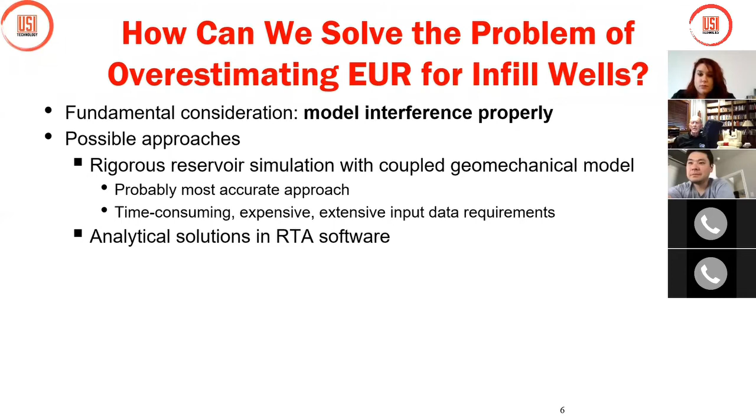Another approach which some people have used is to use analytical solutions that are available in rate transient analysis software. The basic idea here is to history match early data, which is going to be mostly transient data, that is pre-interference, and from those data, maybe get estimates of permeability and fracture properties. And then given that reservoir description, then with the analytical models, put in different well spacing to see when and if we're going to have interference.

The problem here is these analytical models are really simplified. They're basically built on single phase flow models, and that's not real life either.

Probably the approach that most people use most of the time is to base well histories on what they find from empirical decline curve matching and put those together and construct type wells, kind of averaging the empirical decline curves. Problem with that is pretty serious. And this is going to model interference only if that interference was present in the production histories of those wells that were used to construct that type well.

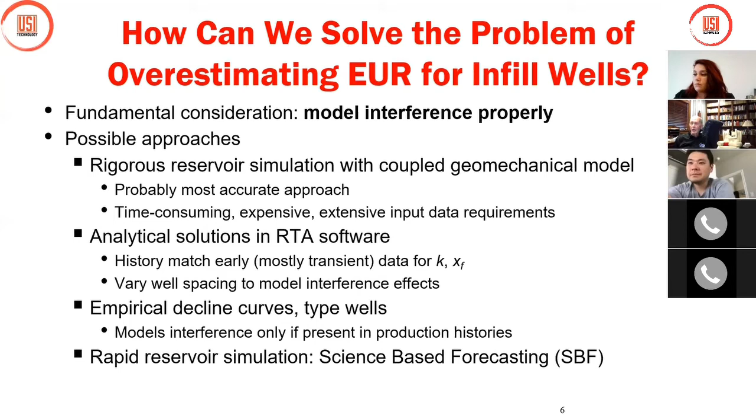So there's a need for something that's simple, rapid, inexpensive, and that can properly take into account interference. And I'm going to suggest to you that that methodology is what we're going to focus on here today, which we call science-based forecasting, or SBF.

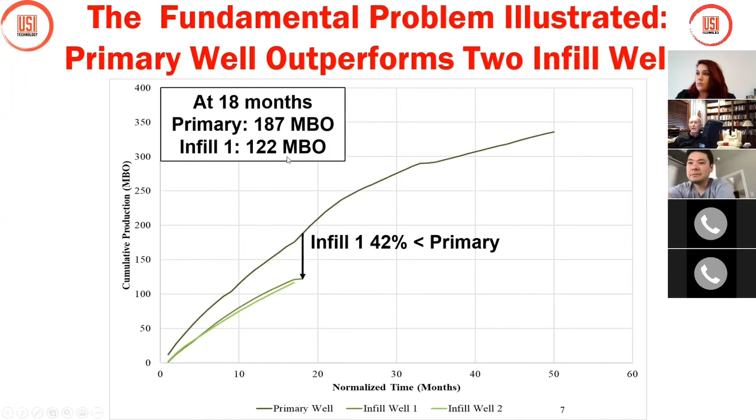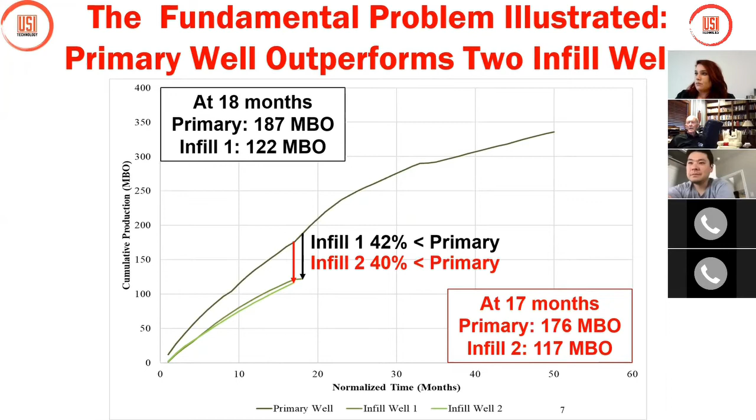To be quantitative about it, for infill well 1, which had produced for 18 months at the time that we did a study, it had produced 122,000 barrels, whereas at that same 18 months after production began for the primary well, it had produced 187,000 barrels. That's a 42% difference. And infill well 2, drilled near infill well 1, at 17 months of history that was available after it began to produce, had produced 40% less oil than had the primary well at the same time. So the infill wells are definitely underperforming.

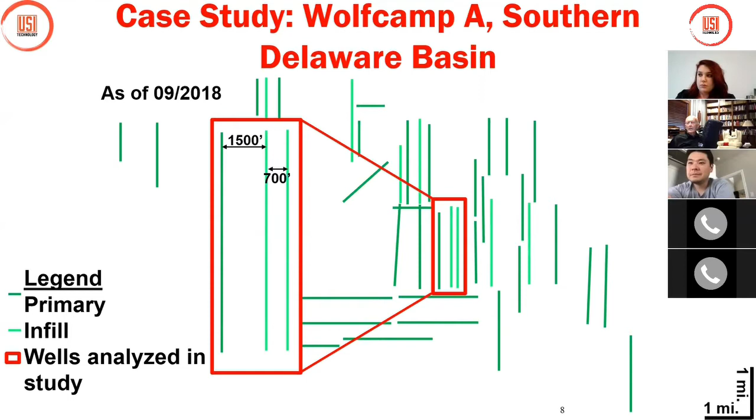Now, the location of these wells and the basis for our case study here, these wells are in the Wolfcamp A formation in the southern Delaware Basin. The wells in question are shown here outlined in red. The primary well is shown in dark green, and the 2 infill wells near that primary well are shown in lighter green. Here we blow up this area. Infill well 1 is located 1,500 feet from the primary well, and infill well 2, 700 feet to the east of infill well 1. These are the 3 wells we're going to be looking at.

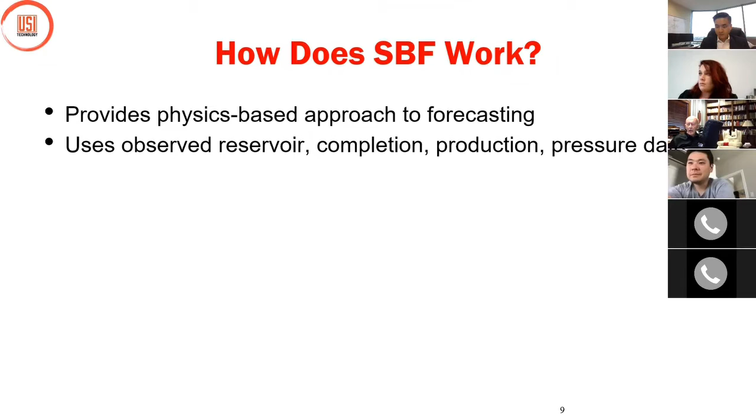And we're going to be looking at them with SBF, so let's address the question, how does SBF work? Well, SBF provides a physics-based approach to forecasting. It has all the rigor of reservoir simulation, which I mentioned earlier was the gold standard, except as it has been applied traditionally in industry, it's very time consuming. But SBF provides that same rigorous approach, and as available, it makes use of observed reservoir, completion, production, and pressure data. And if that's not complete, well, we just proceed without it.

The reason why this is fast is what SBF does, it retrieves pre-run simulations as a basis to history match the production in the primary well.

With SBF, there has been a catalog developed which has thousands of simulations, and as reservoir engineers describe the characteristics of their area, we can pretty quickly find some simulations that have been run in situations that appear to be quite similar to the one under consideration. So what SBF does, it selects candidate simulations from stored results with parameters in the range of these known parameters.

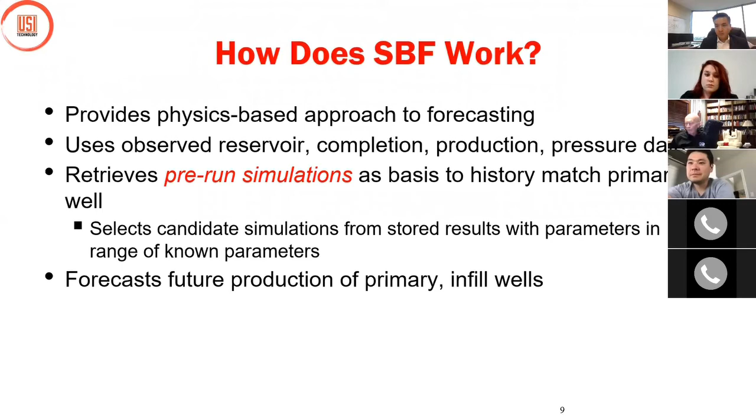And then on this basis, we can forecast what the production of the primary well is likely to be, and also assuming that the infill wells have characteristics which are somewhat similar to the primary wells, but with a range of uncertainty allowed, we can forecast the future production of the infill wells. Here's an example of what was done in this particular study. I showed you this earlier, but in a bit different form.

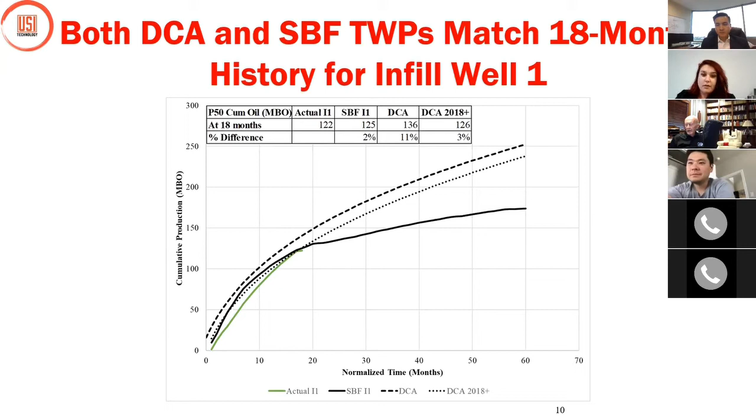But you can see on this graph already that there's really a difference in the trend after that. And I'm going to suggest to you that the reason for that is SBF takes into account possible interference, and the type wells just don't, because there's no interference in these earlier production histories. And that's going to cause quite a difference. I'll elaborate on that as we proceed. So we might ask, why use SBF? What makes it different from the decline curve based type well approach?

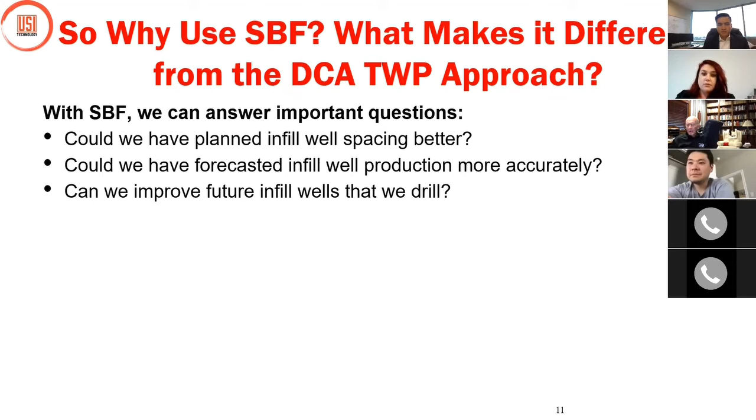Well, with SBF, we can answer some important questions like, could we have planned the infill well spacing better? Now, let's acknowledge what's done is done. Those infill wells have been drilled. They have been completed. There's nothing we can do about that. But maybe in a similar situation, we can do it better by studying the situation. And so maybe we could have forecasted the infill well production more accurately had we used SBF for planning purposes. And we might have been able to improve the future infill wells that we drill, space them in a better way, and complete them in a more realistic way.

And with SBF, we have some additional analysis techniques that are available. We can do pre and post drill type well comparison, type wells constructed from SBF in this case. We can ask questions like, is there an optimal spacing for our project? SBF has the capability of analyzing well spacing, as I'll show you. How does an index that we call FDI impact infill production? This is basically an index which looks at overlap of drainage areas for adjacent wells.

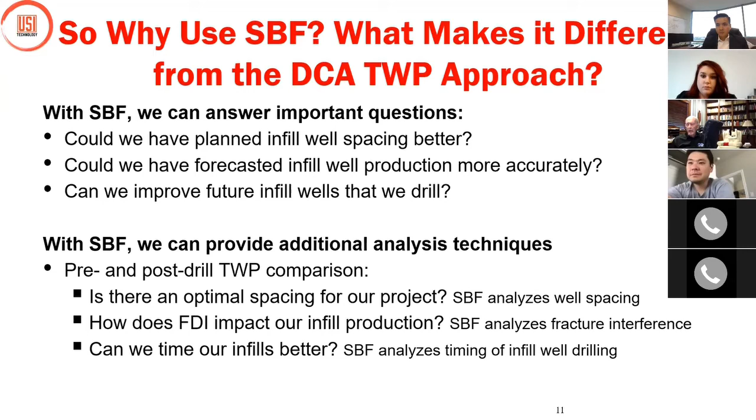And SBF has the capability of analyzing interference between fractures. If a fracture for one well goes into the drainage area of another well, that's definitely going to cause interference, and we've wasted money on either well spacing or fracture design if this happens. And then finally, SBF can answer the question, can we time our infills better? Well, SBF can analyze the timing of infill drilling. We could look at what happens when the infill well is drilled and completed at about the same time as the primary well, or 6 months later, or a year later, or a year and a half later. And we know from many studies in the industry, the later the infill well is drilled, the more interference we're going to have, the poorer the recovery we're going to get from the infill well. And we can study this with SBF.

Let's look quickly at a spacing sensitivity analysis. Now here's the actual situation that I showed you on the earlier slide. We have a primary well 1,500 feet away. We have infill well 1. 700 feet away from that, we have infill well 2. That's done. There's nothing we can do about it. But again, we can study how we could have done this better.

So we ran several cases. I show 3 of these here for illustration, in which we placed infill well 1 at different distances from the primary and infill well 2. And focus particularly on case 3. The infill well 1 is located about halfway in between the other 2 wells. And that turns out to be the best case.

Now, we also looked at the possibility of drilling a 3rd infill well about halfway in between infill well 1, where it's actually drilled, and the primary well with the thought that maybe this is going to improve recovery. And we'll look at the economics of that before we're done. It turns out this didn't turn out to be a good idea, and we shouldn't do it.

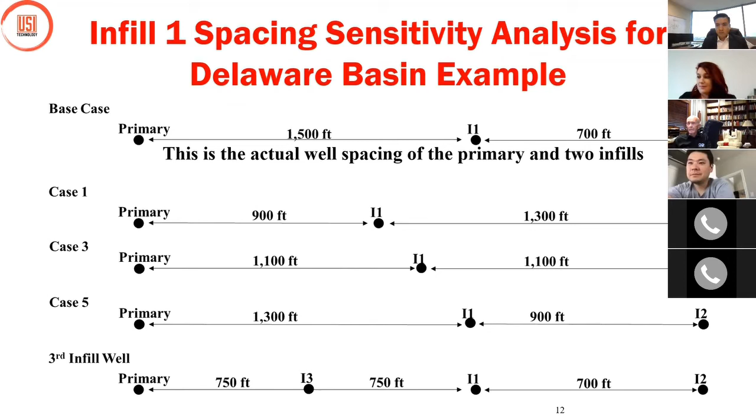But let's go on. This graph summarizes the results of the spacing study. And what we have plotted here is cumulative production for 18 months comparing these wells, but also with the black dots, this shows the estimated ultimate recovery for a 30-year well life. Case 3, with infill well 1 halfway in between the other 2 wells, turns out to be the optimum.

This is the recovery from infill well 1. Now, of course, we have to look at recovery from all 3 wells in the project, but we can do this for each well like we did it here for well 1. And that spacing halfway in between is clearly better than other alternatives.

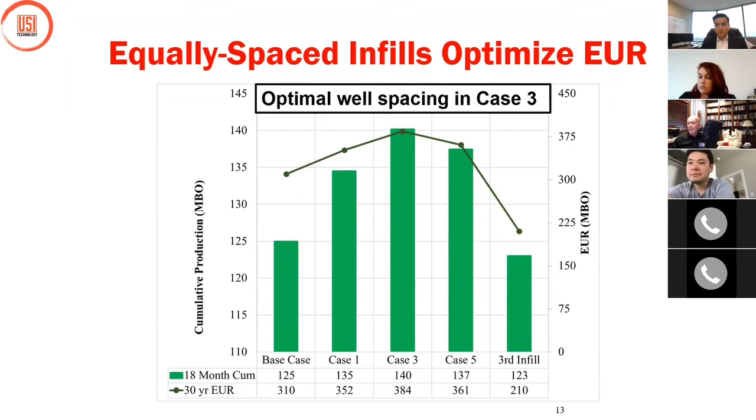And look at what happens to well 1 when that 3rd infill well is drilled. That really takes production away from infill well 1. And this is the case of poorest recovery for infill well 1. Of course, we accelerate production with the 3rd infill well, and we have to look at what that does in our economic study, but it doesn't turn out to be attractive, as I'll show you.

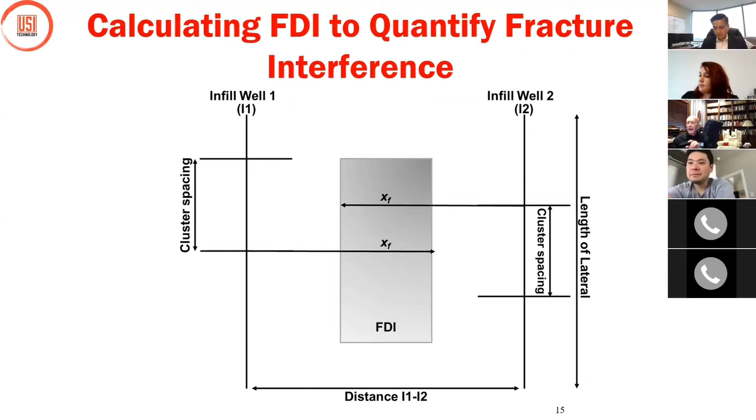And it turns out that that simple calculation that we can make once we use what we know about fracture lengths, either from fracture design that we plan or from what has been achieved that we determine from analyzing the data, that simple calculation correlates extremely well with the amount of interference.

And so we did a study of the impact of FDI on production forecast, and we show the base case here with a modest amount of overlap with 394-foot fracture lengths in both infill well 1 and infill well 2. Now, 394 feet, that's what we think the fracture length is in infill well 1, but we looked at what would have happened with different fracture lengths in infill well 2, going from short with no overlap, FDI 0, to a major amount of overlap with a 650-foot fracture, and that gives us 35,000 plus acre feet of overlap.

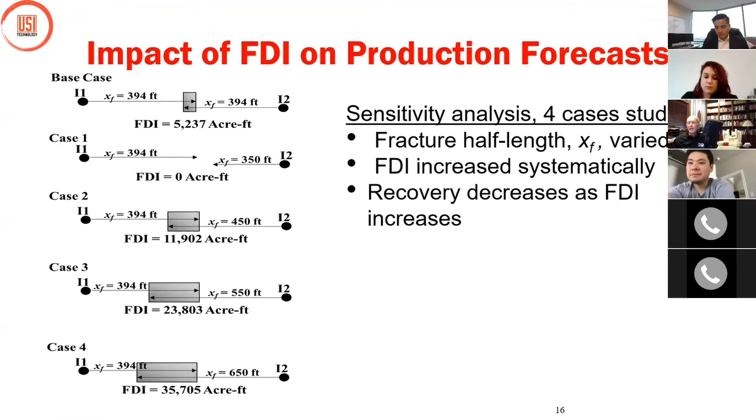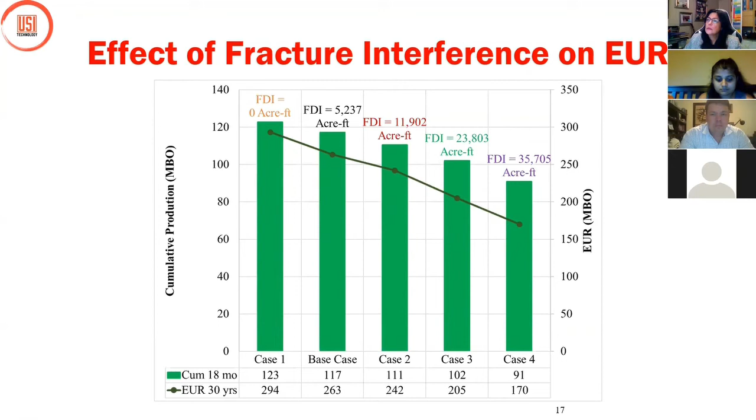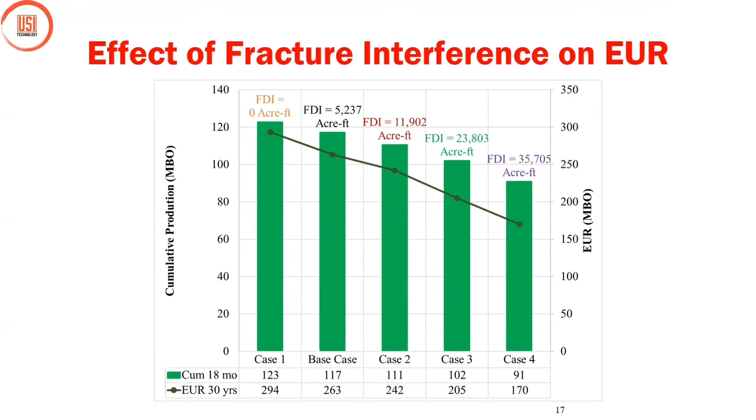And so the fracture half length was varied in the study. FDI was increased systematically, and the recovery decreased as FDI increases. So FDI and the amount of fracture interference correlate extremely well. So you can sort of predict what the outcome is going to be by calculating FDI. And the green bars, these come from the detailed reservoir study for 18-month recovery and the 30-year EUR. And the bigger FDI, the more the interference. Now, this is only in one well, but again, you can study each well overall and look at overall project outcomes, very simply.

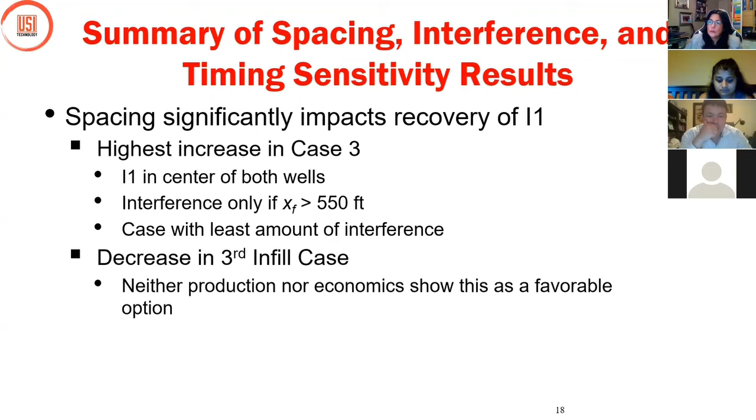In the case of drilling a third infill well, that decreased EUR, and neither the total production nor the economics showed this as a favorable option. And again, very importantly, this increased value of FDI, the bigger that is, the poorer the recovery.

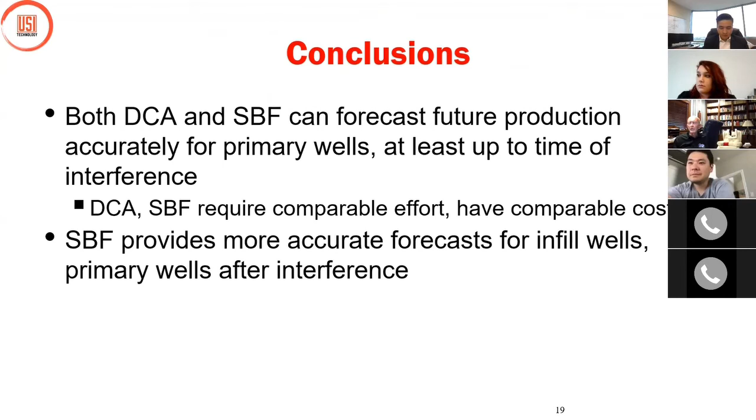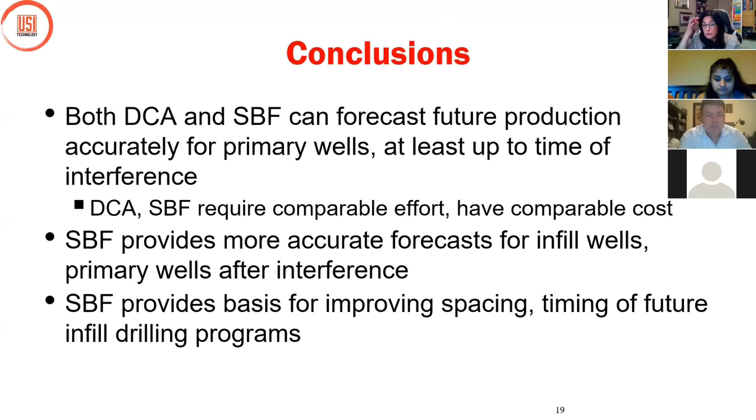So in conclusion, I'd say that both decline curve analysis-based type wells and SBF can forecast future production accurately for primary wells, at least up to the time that interference occurs. Decline curve analysis and SBF require comparable effort, and it turns out the costs are comparable. But SBF provides more accurate forecasts for infill wells and primary wells after interference occurs. Decline curve analysis just can't predict future interference. All the decline curve can do is look at interference that might have occurred during the lives of those wells. So SBF provides a sound basis for improving spacing and timing of future infill drilling programs.